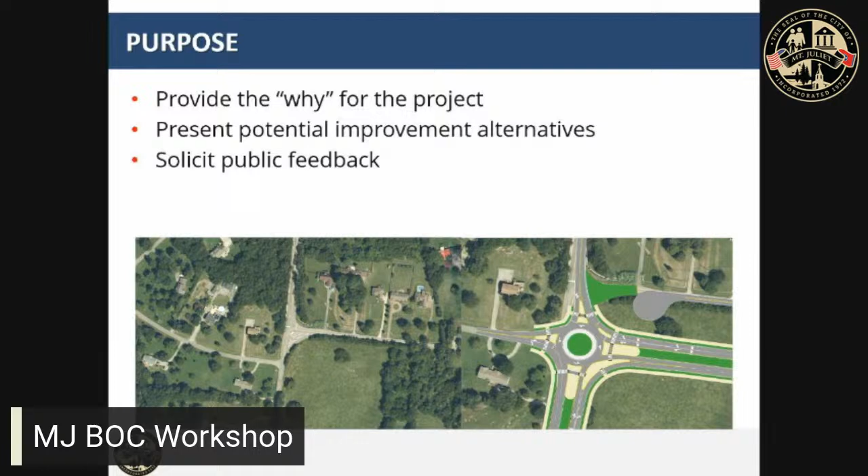We're going to present the 3 alternatives that we have prepared. Definitely, again, we want your comments - we're going to say that a couple times during this presentation. At the end of the presentation, we're going to put up our 3 boards with our 3 alternatives. We're going to have those manned, so please come up and talk to our staff, talk to city staff. Let us know what your concerns are, let us know what you're worried about, let us know if there's anything unique about your property that we need to be aware of as we go into design.

Okay, I'll turn it over to Matt. Thanks, Dave. Forget how tall he is.

I want to go over the project objectives. We've done some preliminary investigation on the roadway and wanted to come up with what's needed, what the concerns are. It came down to 2 basic concerns: improve the operations of the roadway and improve the safety. On improving the operations, there has been and will continue to be significant growth in the area - everybody's seen a bunch of subdivisions come in, a lot of things getting developed, so on and so forth.

That's adding more and more vehicles to roadways that were just 2-lane cow paths at one time. Consideration for bicycles and pedestrians - that's becoming a very popular mode. Everybody is starting to use that, get healthier, walk out there. We want to give some safe and efficient places for people to use with confidence. From a safety standpoint, we want to address the current hot spots.

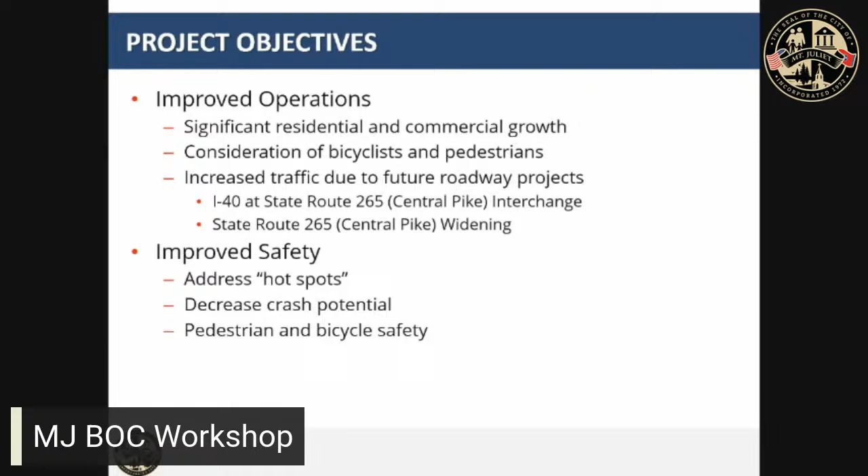All you guys know that road near and dear to your heart. I love that little hairpin curve where the guardrail is messed up every time I drive by it, so it would be nice to actually get that fixed. Guardrail's great, but it's still a fixed object and it's still getting struck. So let's correct that - give you guys something that flows nicely, keeps people at speed, and keeps people safe and gets them from A to B, for all modes of travel, not just cars.

So this gives you some base information on the project we have to date. It goes from Central Pike to Old Pleasant Grove Road. The idea is to widen it from the 2-lane section you have now to a 4-lane, and we'll get into the specifics in just a minute. We want to add accommodations for both bikes and peds, and then look at the intersections - there's a few within that area we want to make sure have the proper improvements to keep things flowing nice, safe, and freely.

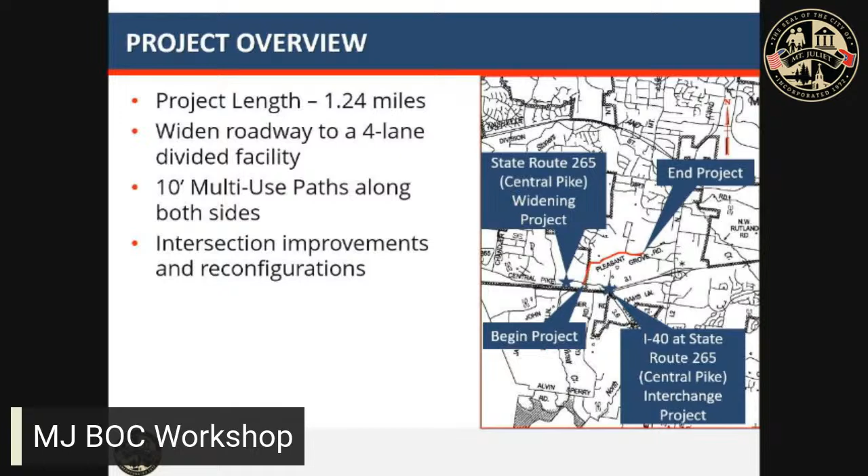This gives you a little overview of what the project looks like a bit closer. Like I said, Central Pike to Old Pleasant Grove Road, and then we've got a few intersections with Burton Place, Triple Crown, and Trevor Drive.

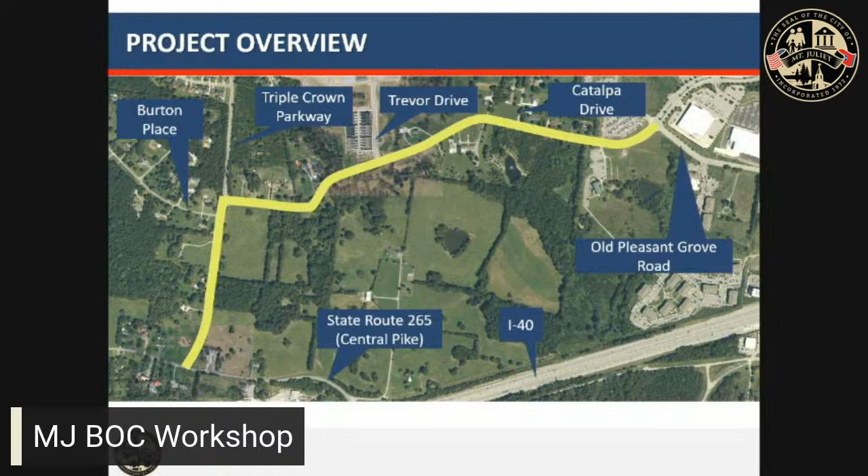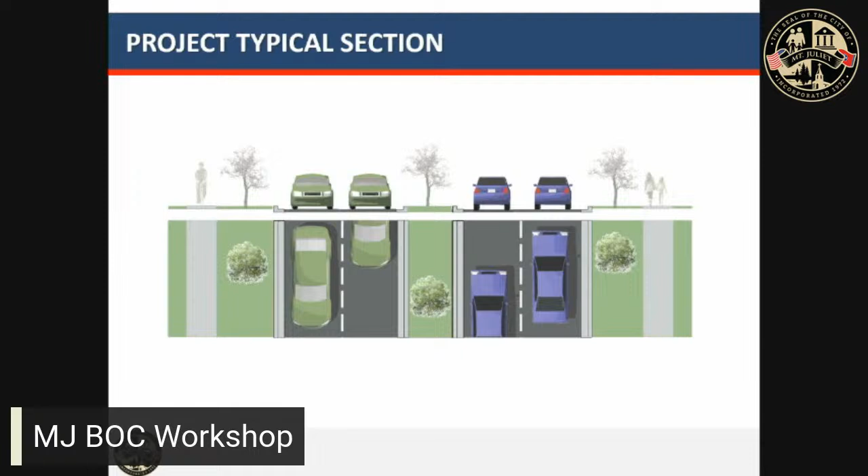So looking at the aerials is fine, but what does it look like when you're on the road? This gives you a great little rendering of what we're currently considering for the roadway. Starting from the outside in, the idea would be to put two 10-foot wide multi-use paths, which can accommodate both bicyclists and pedestrians. There's a bit of a buffer between that and the travel lanes that will keep them out of the clear zone, adding a factor of safety and giving vulnerable road users - bikes and peds - some breathing room and confidence.

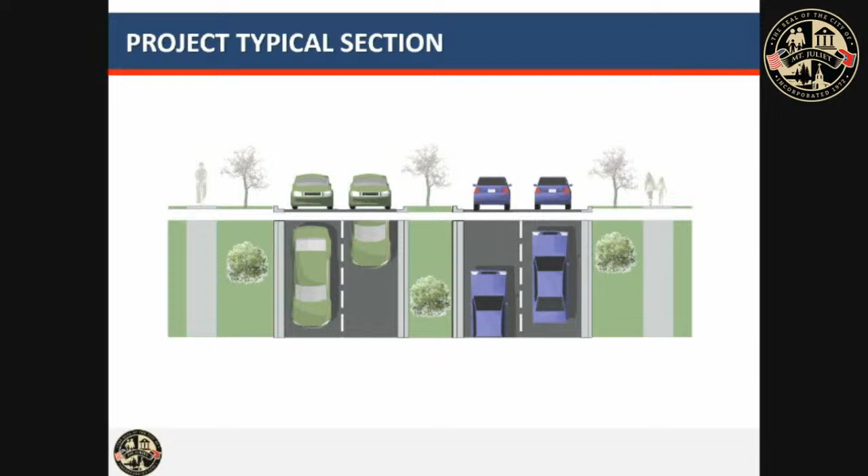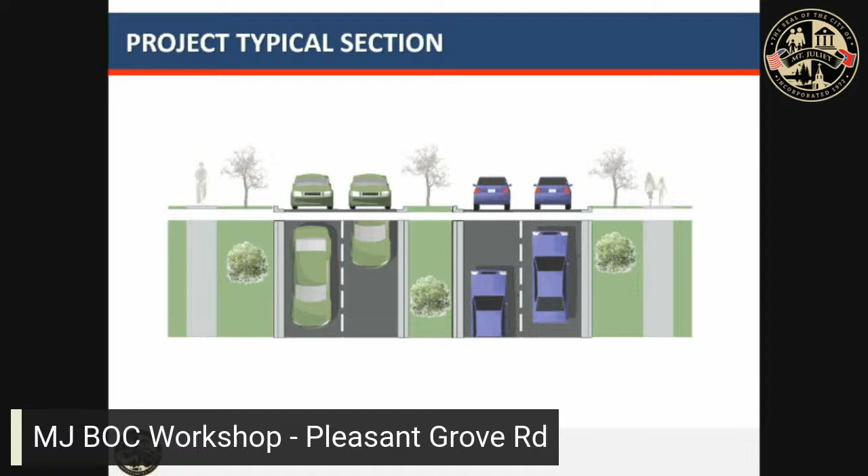And then in between the opposing lanes of travel, we've got a raised median. I want to briefly touch on that - it was picked for a few reasons. First, it continues the section that's already there from Old Pleasant Grove on. Second, it gives us the ability to add in left turn lanes where appropriate. It also calms the traffic down, giving a nice buffer between the two opposing lanes while keeping people's speeds down. It does eliminate a two-way left turn lane, which statistically is a little less safe than a 4-lane would be. That makes sense because people continually use that center lane to pull out and stall, which can lead to interactions that aren't always safe. So this eliminates that concern.

So there are 3 alternatives that you guys are going to see tonight, and as we've alluded to, they'll be set up for you to look at in greater detail. I'm just going to glance over some of the high points here, and we'll be happy to explain more when we get to the boards, but there are some common improvements between all of them.

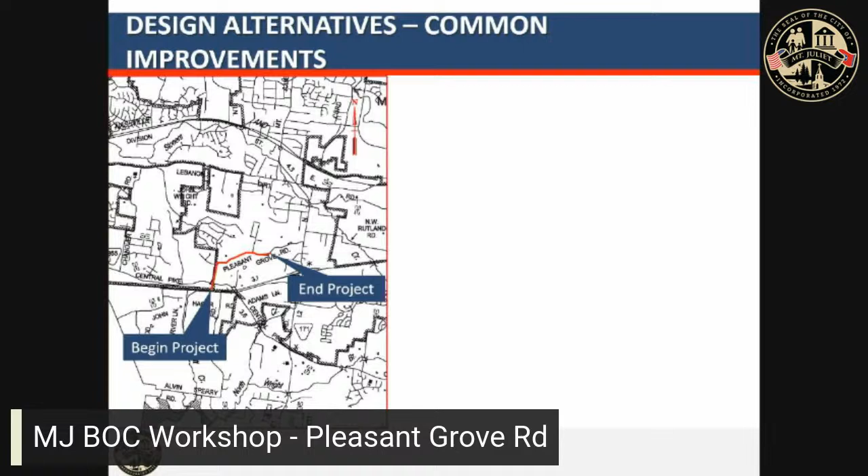The first one's going to be at the southern end of the project - that little segment tying into Central Pike. The first thing everybody probably sees is that little red, amber, green symbol there, for signalization. I appreciate that - it makes me feel good.

Oh no, I've done it a few times, so I'm with you there completely.

So signalization is definitely in the cards for this. But the other thing we looked at was adding in the dedicated left and right lanes so we can move those vehicles off and let them wait until there's a gap, without imposing on the through movements of the intersection. Likewise, the approach is going to be similar, coming down the way you see on the screen and turning into Central Pike to give everybody better sight lines.

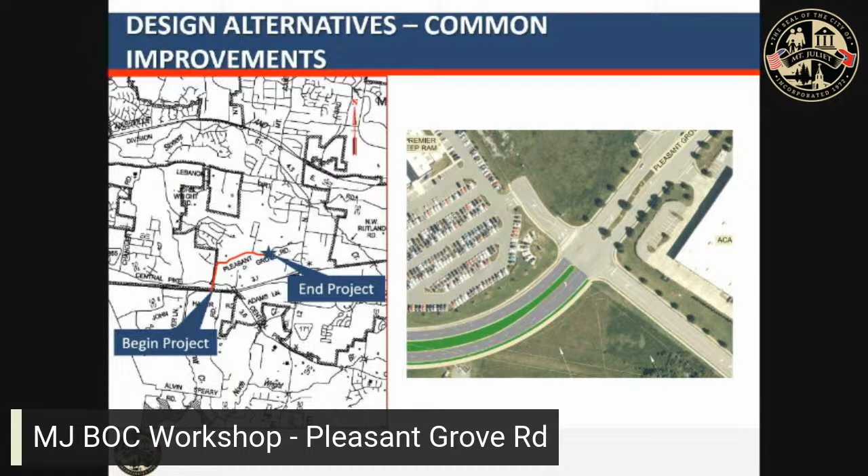Now we're going to flip to the northern end of the project. This one will match up to what you already have at Old Pleasant Grove Road. There's a left turn lane put in there to get into the dealerships, meant to continue what you already have and bring it through to begin our corridor.

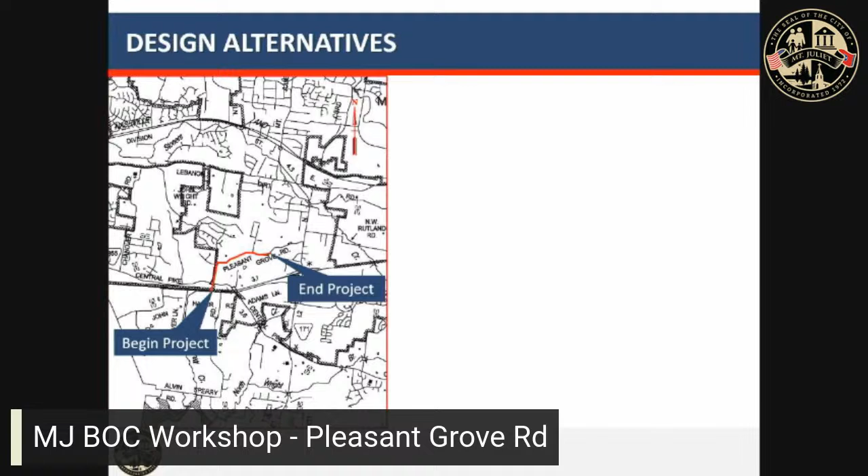So why are we having this meeting? Where's the feedback if those are common? Mainly because we have one focus area we'd really love your feedback and ideas on, and that's right here, around the area of Triple Crown. The alignment actually goes into a new alignment in all three alternatives, and it does it in slightly different ways, with different ways we treat Triple Crown's intersection. That's something that would be very interesting to get feedback on.

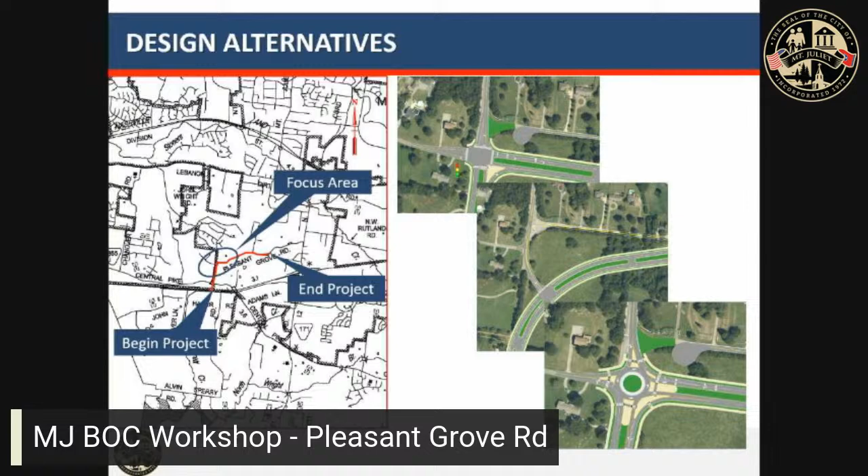You can see them displayed to the right. For the first one, this is what we're calling the free flow curve alternative. For the conceptual design, we took one leg from the south and one leg from the east and brought them together with a curve that's at speed. The one thing I'll say about this alternative is it's probably the most invasive of the three as far as impeding on adjacent property. The benefit is it gives a truly free flow movement, meaning no stop signs, no signal, no yield, nothing on Pleasant Grove Road.

It extends Triple Crown down into the intersection, and then we drop a bunch of stop signs at the existing Old Pleasant Grove Road, Burton Place, and there. Those would all be controlled by stop signs.

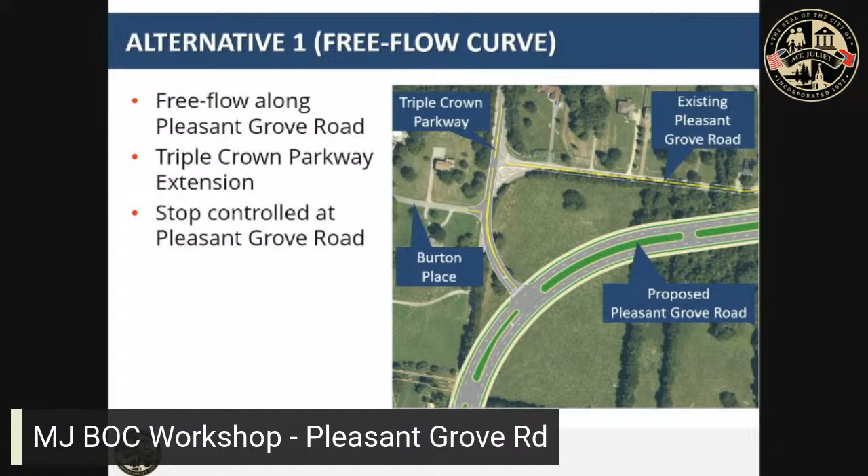For our second alternative, this is the roundabout alternative. As you can see, the roadway is shifted, but less than what you saw in alternative 1. It's just shifted to line up with Burton Place. The reason for that is we wanted a nice four-legged roundabout where everything comes in very nice and straight. This allows us to have a good design, good functioning roundabout.

What we supply with it are what we call bypass right turns. There's one coming from the southern approach and heading north that would be free flowing, meaning no yield or stop condition — it would just continue on. The same could be said for coming off Burton Place and going down Pleasant Grove Road. Both of those movements would be unimpeded; they'd essentially bypass the intersection using the right turn.

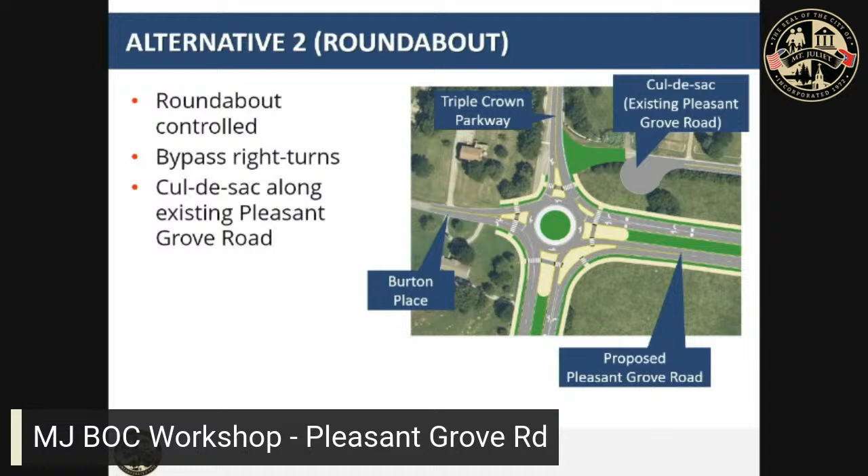And then we have one up here coming off Pleasant Grove Road going onto Triple Crown, but it will have a yield condition because the number of lanes we have on Triple Crown is one, not two. So we needed to put some sort of yield control there, so people mix nicely and no accidents occur.

And this is our third alternative. We're calling this the signal alternative. It's very similar to the one you just saw. We're realigning the existing Pleasant Grove Road to create a 4-legged intersection similar to the last one. This one is slightly different in that there's only one bypass right turn lane.

So Matt, could you point to the southern end going up to the right? Similar to the roundabout, this is the only bypass right on this one. For all the other movements, you'll come up to a stop line and it'll be controlled by a traffic signal. Other than that, we're providing double left turn lanes if you're going from the north end of the project to the southern end. Could you point that out real quick? Sure. Yeah, so that movement there from that left there will be dual left turn lanes.

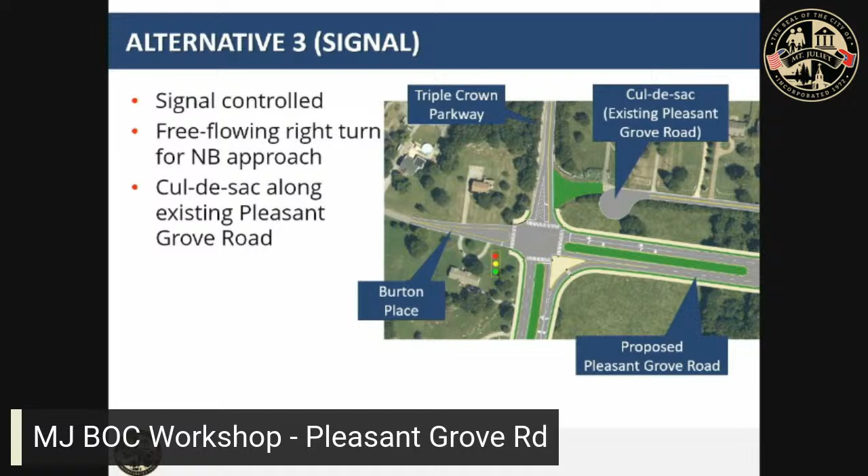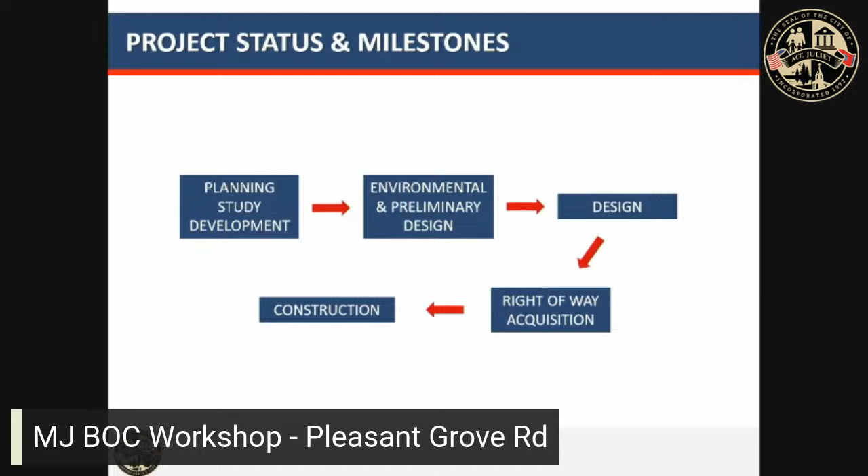Where we are today, go ahead and click it again. The life of a project. Boy, I think y'all heard about TDOT projects and how long they take to get to actually breaking ground and making things happen. Right now, we're in the planning and study, and we're developing our alternatives and developing what would be eventually our recommended alternative.

We're going to work with the city and determine what that alternative is based on your comments, based on commission comments, et cetera. If that's my wife, I'm not here.

We're working our way into the environmental stage. Some of you may have seen our environmental scientists on your properties taking a look at streams and critters and those types of things. We're developing that report, and we're also developing our preliminary design.

Sorry, I'm right in the pole here. After we get our approvals of our preliminary design, we'll move on to full-fledged design, preparing our construction plans for the project, followed by right-of-way acquisition.

Now, we're not going to talk much about right-of-way acquisition tonight. That's not the purpose of this meeting. We will have a subsequent meeting where we'll bring you all back in again, show you where the impacts are, show you where the conflicts are, and show you what's going to happen. We'll talk to you about the negotiators and appraisers that will come out and walk you through the entire process. But like I said, that isn't the purpose of this meeting. That will be in a subsequent meeting.

And finally, the one thing everybody's worried about is construction. Right now, we're estimating fall 2027. Seems like a long way away, but there's a lot to do before we get there. So that's about where we ended up. We're hoping to speed that up if we can, but right now, that's what we're estimating.